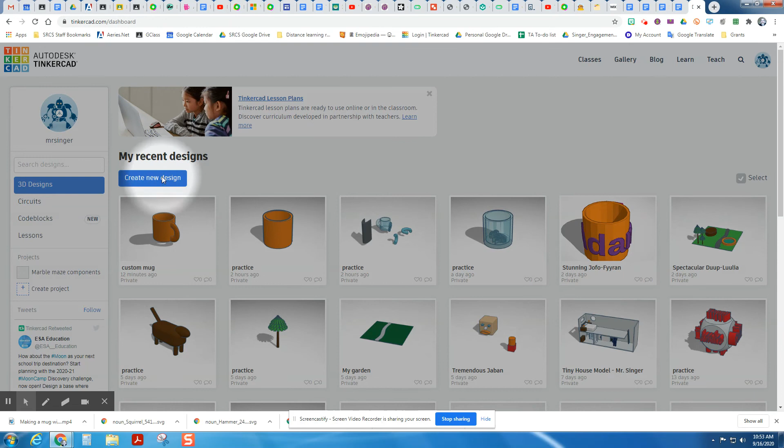The first thing we're going to want to do is click on Create a New Design. So we're going to open that up and immediately name it. We're going to call this Name Mug. I'm going to click into here and type Name Mug.

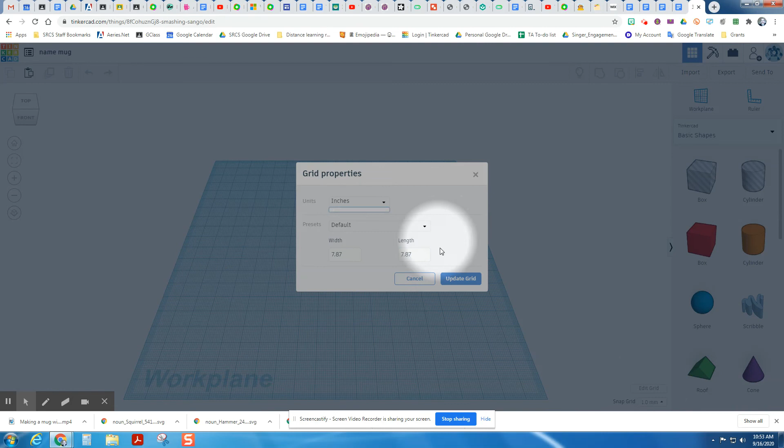Secondly, we care about size in this assignment, so we're going to have to change the units from millimeters to inches. That's in the Edit Grid button. You come up to Units and change it from millimeters to inches, then click Update Grid.

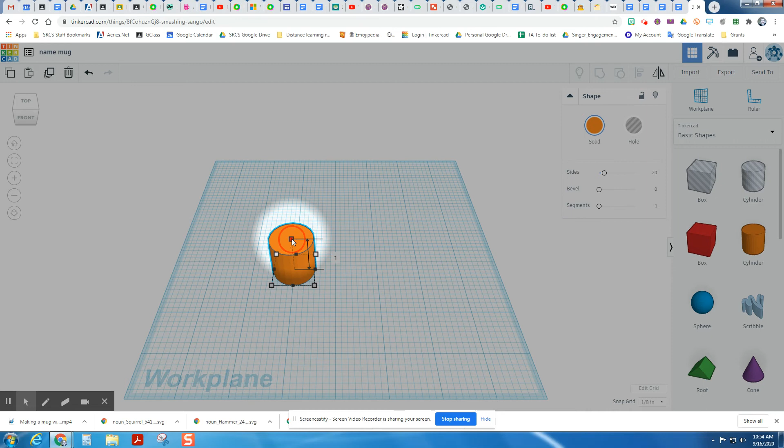So the first thing we're going to do is pull a cylinder in here, and the very first thing we're going to do is make it a lot bigger. Right now this is 1 inch by 1 inch by 1 inch tall. We're going to hold the Shift button down and grab it by the top white dot, and pull this until it is 3 inches tall and wide. If you held Shift down, it made all dimensions 3, 3, and 3.

Looks good. From there, we're going to smooth out these sides. Right now it's only made out of 20 sides, and we're going to increase that number up to 64. That's nice, a lot smoother.

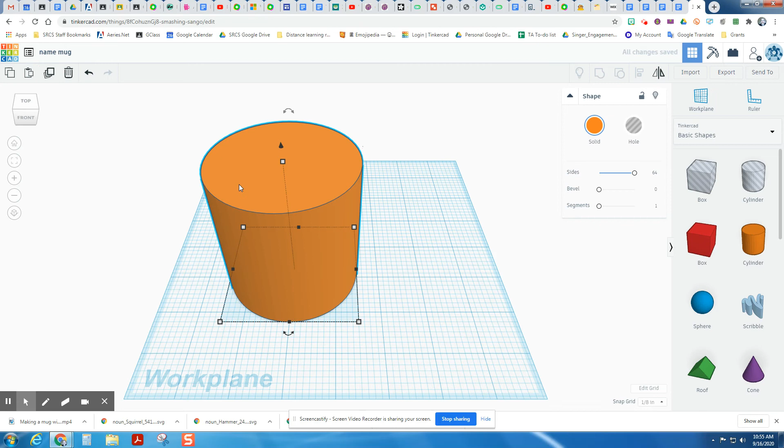So we need to hollow out the middle of this, and we're going to do that with a cylinder-shaped hole. It needs to be about the same size and shape as this, so instead of doing all that work again, we can select this and use the Duplication Tool. If we click Duplicate, it'll make a copy, and I can move that copy out of the way. I'm going to make that copy into a hole. Then we need to make this a little smaller than the original.

So I'm going to hold the Shift button down, and pull this down 2 clicks while holding Shift. It should go down to 2 3/4, and I'm going to let go. If you held the Shift button down, it made it into 2 3/4 in every direction.

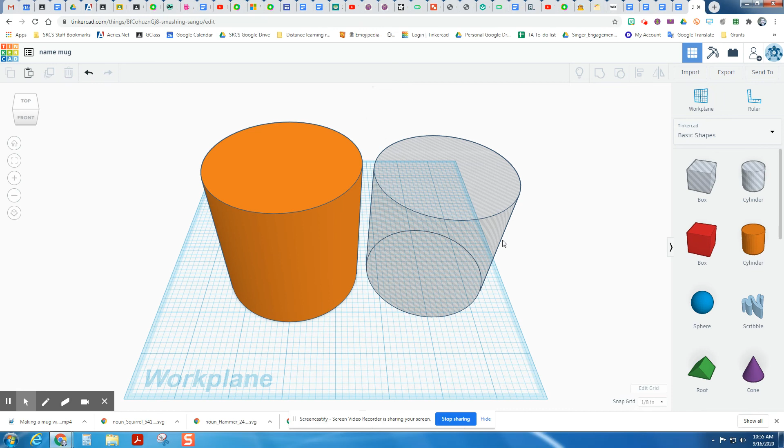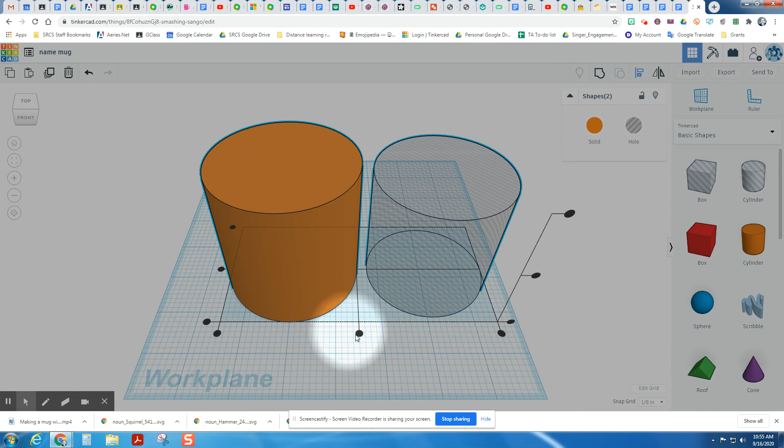Now we need to line these things up. They need to be lined up in the X, or left to right, direction, and Y, the front to back direction, as centered, and then we're going to line them both up with the top. I'm going to do that by first drawing a box around both of them to select them, then using the Align tool. We want to line them up left to right and front to back centered, but in the up and down direction, we're not going to center them — we're going to line them up along the top.

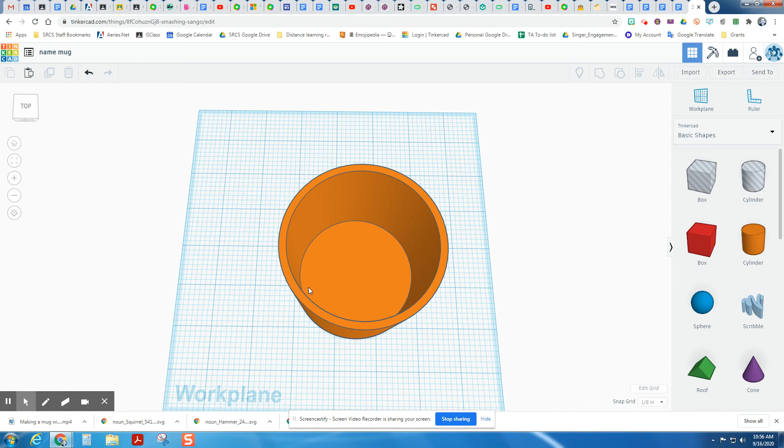Then we can group it using the Group tool, and you can see now that my hole has turned into an actual opening, and since it was lined up at the top and a little smaller than the original cup, it left the bottom as solid. Good start here.

So now we need a handle somewhere. The easiest way to make a handle that I found is in shape generators, not in the basic shapes category, but if you go to shape generators, all, and go down to page 8, I believe it's on there.

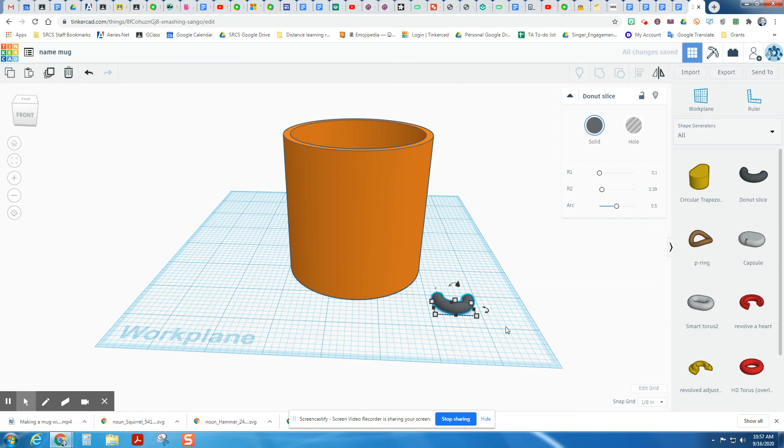Page 8 has this at the very top, a donut slice shape. If I pull a donut slice shape in, it will give us what we need. But we've got a problem: it's facing the wrong direction. We need to rotate it this direction.

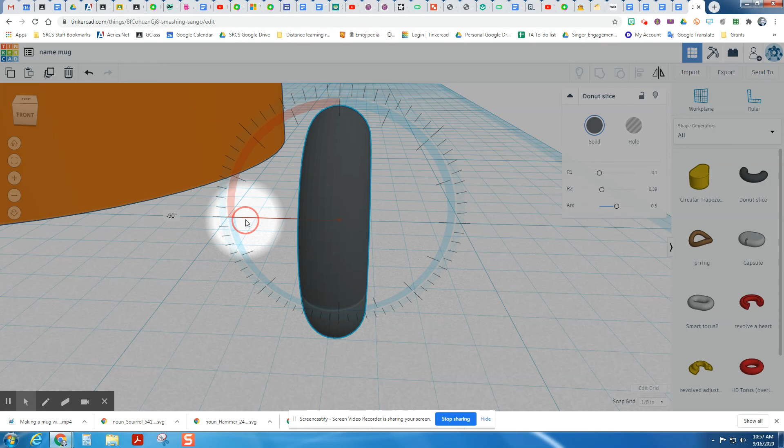So what I'm going to do is zoom in on this. Actually, I'll use this zoom tool, and I can really easily see the curved arrow in this direction separately. I'm going to grab onto that and rotate it until it gets perfectly up and down, or 90 degrees. It's a lot easier to rotate inside the blue circle there. Okay, I'm going to let go and click away.

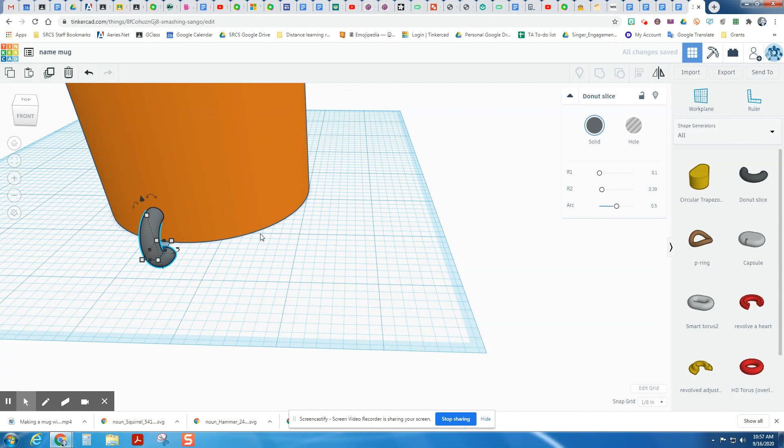And now it is facing the right direction. Let me zoom back out again. It's not where I want it to be yet, and it's not the right size, but at least it's facing the right direction. So I'm going to select it and use the left and right arrow keys to get it somewhat centered there.

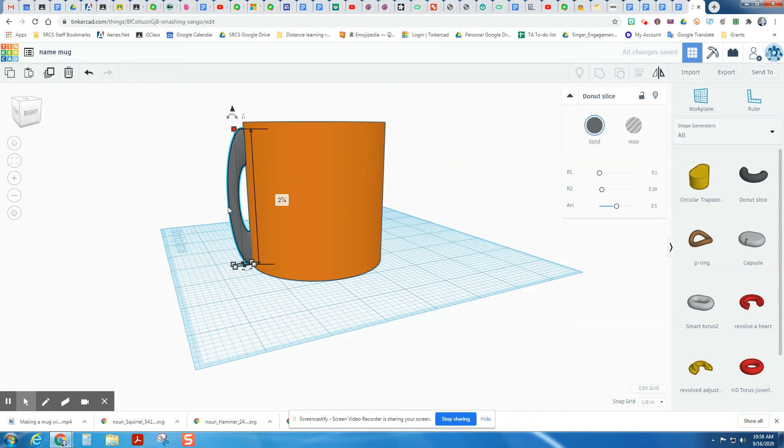Then I need to lift this up so the bottom is actually not underneath the mug. Good. And if I zoom out a little bit more, go back to here, and zoom out a little bit more from the side, I can make this taller by grabbing the top white dot and making that taller. It doesn't look like there's still a lot of room in there. I probably should zoom in—and zoomed in too far there.

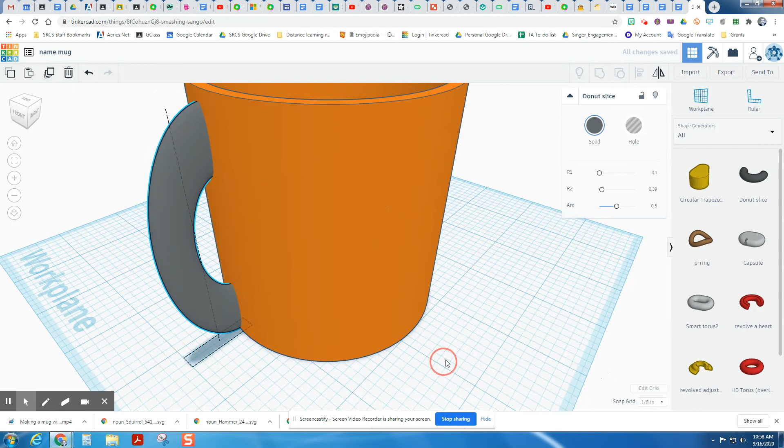I can come and pull it wider in this direction. I'm pulling the black dot out. Okay, I want to look at this from lots of directions. Looks like this isn't quite touching, so I'm going to move the whole thing in a little bit so it's inside the plastic, looking pretty good there.

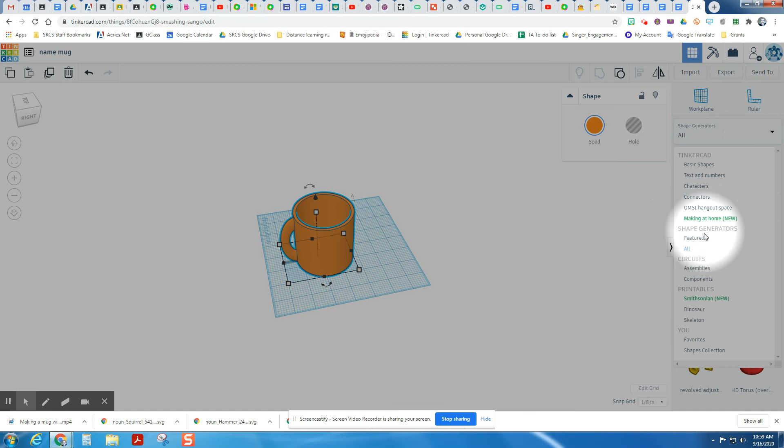I might move this thing a little more this way. That looks nicely centered and looks good. So now it's time to group all of that. I can pull that together and click on group, and that looks pretty good there.

So the very last thing we're going to do is add a name to this. We're going to go to shape generators, but this time go to featured and use that tool we learned yesterday, the custom font. I'm going to put my first name, Adam, in as the text.

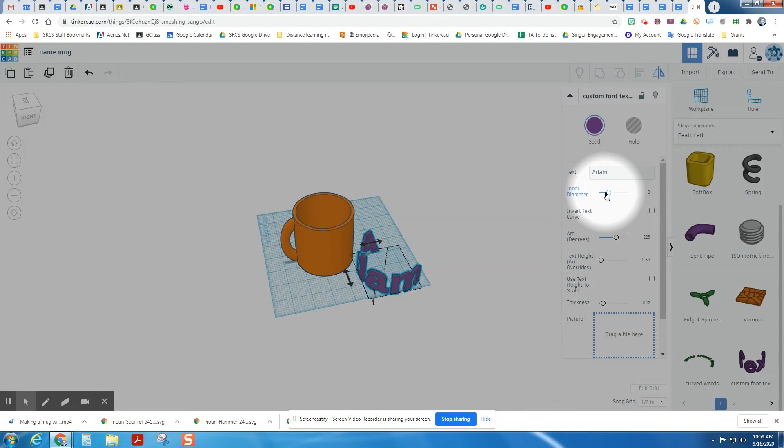We need the inner diameter to match the mug here. So the inner diameter is going to be 3. I'm going to just kind of click into here and make that 3 inches. And that looks pretty good there.

Let me see how many arc we want there. And the inner diameter, that's looking pretty good. Thickness, the text arc...

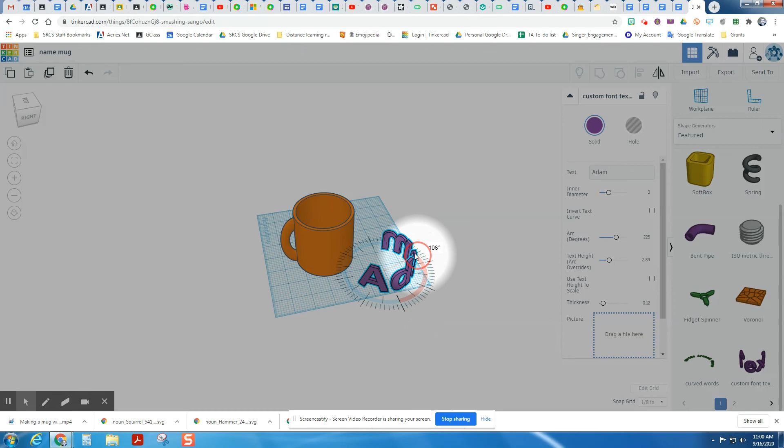We can move this left or right. So we can pull this around, I believe. And I may want to rotate this thing. So once I am done with that, I can click on the shape and rotate this shape.

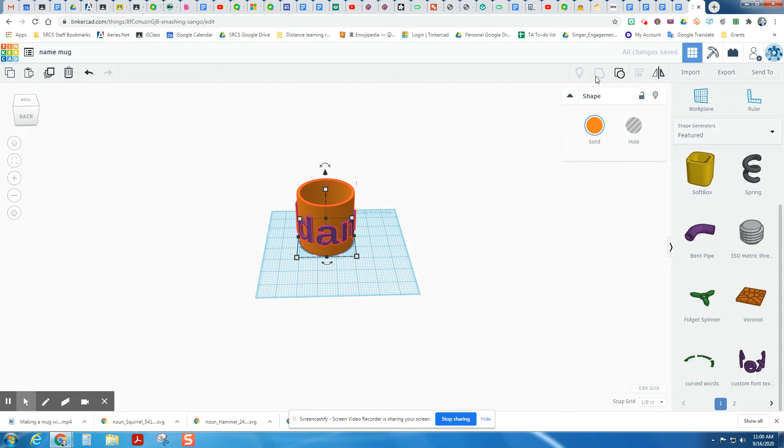This is why I wanted you to practice rotation. Okay, and then I'm going to pull and move this until it looks like it is lined up with my mug. Looking pretty good here. And then I'm going to need to lift this up so it's kind of centered on the mug. And once you're happy with its location, we're going to want to group that.

And you can color it differently if you want. And then looks like you are done. So there's our custom mug. It used a lot of rotation, holes, and 2 custom shapes to make that. So hope that helps.